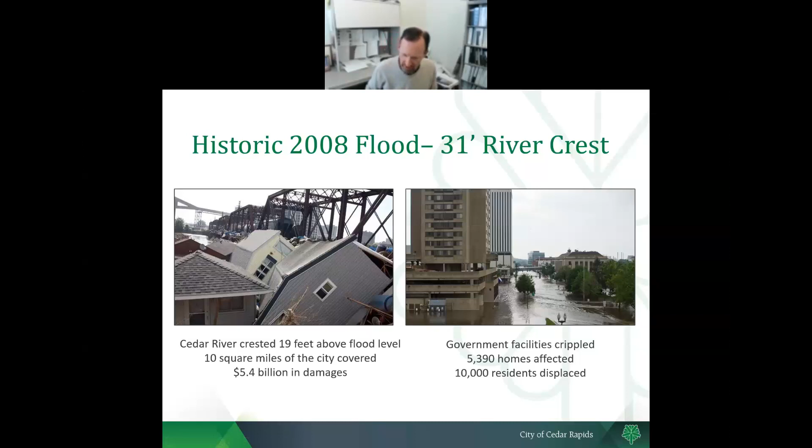First off, I also want to thank you all. It's Engineers Week. It's 4 o'clock on a Friday afternoon. We as engineers don't get a lot of praise. Our public works director likes to say ours is a noble profession, and I agree. And I just wanted to thank each and every one of you for all the things that you do, because at times it is a thankless profession. I know a lot of you work on the City of Cedar Rapids project. So again, thank you. Happy Engineers Week to all of you. And I've already got my Friday afternoon present. About 3 o'clock this afternoon, the City of Cedar Rapids lifted its mask mandate, which has been in place ever since we came back in the office last year. So things are looking up in lots of ways.

Maybe not this picture on your screen. These are some photos we wanted just to give you the sense of 2008. Many of you have probably seen these before, but this is a 31-foot river crest on the Cedar River, 143,300 cubic feet per second. We're probably well below 10,000 cubic feet per second today. This disaster cost $5.4 billion in damages. At the time, it was FEMA's 5th largest public disaster project.

Unfortunately, it has been surpassed numerous times since then, but 10,000 residents were displaced, 5,390 homes were affected, 10 square miles of the city. All in all, about 13% of the city was underwater. And looking at the numbers, the minor flood stage on the river gauge is 12, moderate 14, major 16, and 20 was our record in about 100 years of records. And then comes along a flood that's 11.12 feet above that.

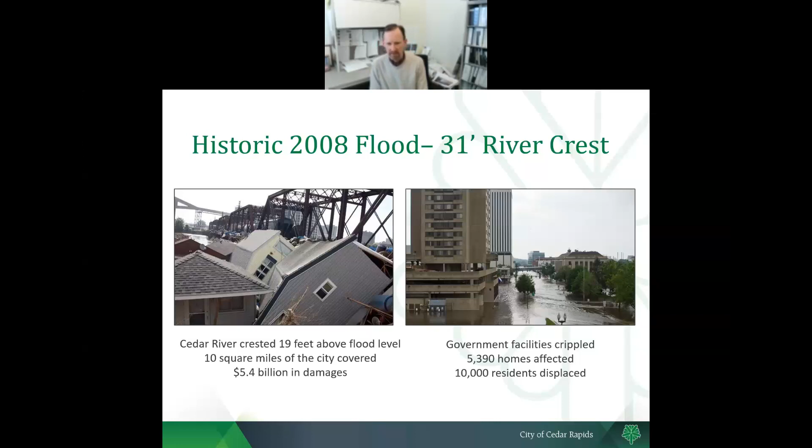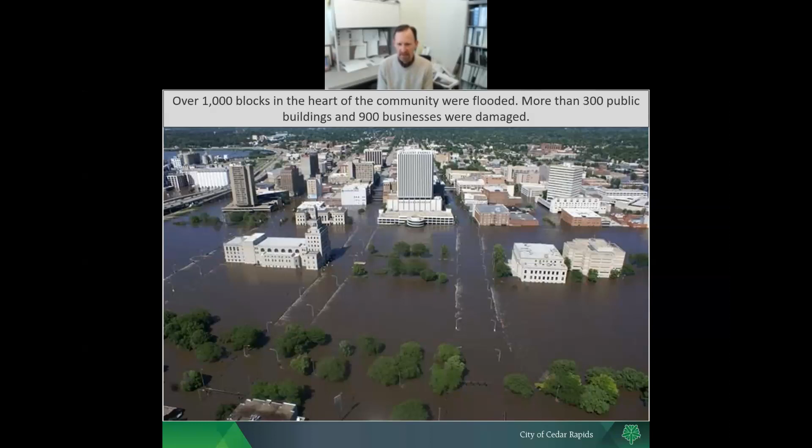If you want to go to the next slide, Mike. Just some other photos here. I think I mentioned in that update there, 1,000 blocks of the city, 300 public buildings, 900 businesses. The kind of ripples in the river there, that's the railings on the First, Second, and Third Avenue bridges. That was our city hall right in the middle of the island there, or in the middle of the river. And then there's also the county courthouse and the county jail on the right side of the screen in the middle of the river. So, just still hard to look at these photos and just imagine how much water there was. Next slide, please.

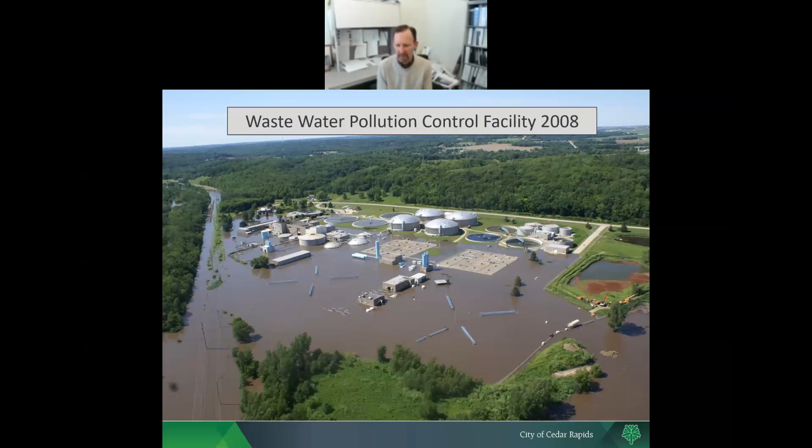Next slide, Mike. So I want to talk just kind of the resiliency here. The picture on the left is June 2008. So we're going to kind of walk you through those. September 2016, we had our second highest flood of record. That was 21.97 feet. So it eclipsed our previous record before 2008 by almost 2 feet, but it was still 9 foot below the record flood. And what's interesting about that one, this was kind of the opposite. There was 12 inches of rain in the upper Cedar River watershed, and then that was it. And then the water came down, but there was no rain on top of that. It was a much drier year.

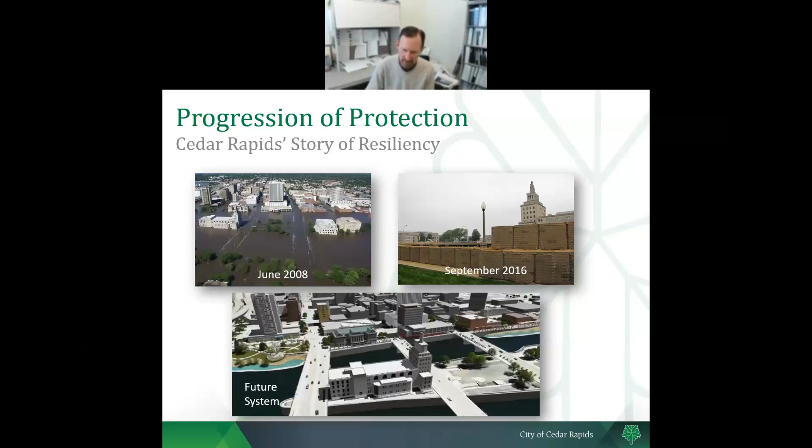So the forecasts of river stage were around 25, but it actually was several feet less, which was fortunate for us because we don't have a flood system in place like is planned for the bottom section there, which is what we're working on with the Army Corps of Engineers. That's the $750 million project. You can go to the next slide, Mike.

This is the flood control system. We'll be talking mostly about the area in the red box there, the Cedar Lake area, the north tie off on the east side of the river. But I'll just walk you through this. The Army Corps project, which we work on with them, is that whole east side. It starts at where that red box is at Interstate 380, and then it runs down the Cedar River by the Cargill plant or by the Quaker Oats plant where the cursor is, Interstate 380, through the core of downtown Cedar Rapids, and then it kind of winds its way downstream past all the bridges, and then there's a Cargill corn facility at the south end there, and it ties into high ground.

The legend is blue is a permanent flood wall where the real estate is restricted. The magenta or purple color is the levees. So I think our widest levee footprint is about 130 foot base and it's about 23 foot high. That's in the Sinclair area. In the downtown section where we have limited real estate, we wanted to be careful not to wall off the river where there's a lot of activity on the river. I mean, it's one thing to have a permanent wall around Quaker and Cargill, but downtown area, we will be going with a knee wall and then removables above that.

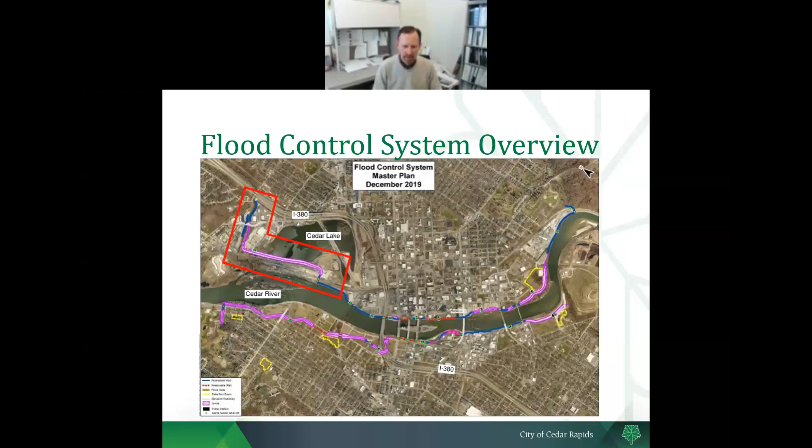But let's start talking a little bit about that area by the Cedar Lake. I want to give you kind of an impression of what we're dealing with here. The original alignment that the Army Corps of Engineers had back in their 2011 report came around the Quaker plant and then tied into Interstate 380 just over by St. Luke's Hospital, where that purple line is. The city had a locally preferred plan that we pitched the Army Corps. It was one of their concepts, but from a benefit cost ratio, this was what was approved in the 2014 WRDA bill.

However, I mentioned that there's a West Side system. At the time that the chief's report was signed in 2011, the West Side system wasn't there, so the river rise to the west side with the East Side system was about 3/10 of a foot. However, when you put in the West Side system, now the river rise goes from 3/10 of a foot to 3.5 feet in that 2008 flood volume, which is the design storm.

Well, because of that, that whole area, Cedar Lake and the properties that surround it, 86 properties would have taken more water than they took in 2008 because of the existence of the system downstream. So that's a problem. Additionally, the Cedar Lake is a very important asset to the City of Cedar Rapids community that desires to turn that into something similar to, I'll say, Grays Lake in Des Moines, if you're familiar with that.

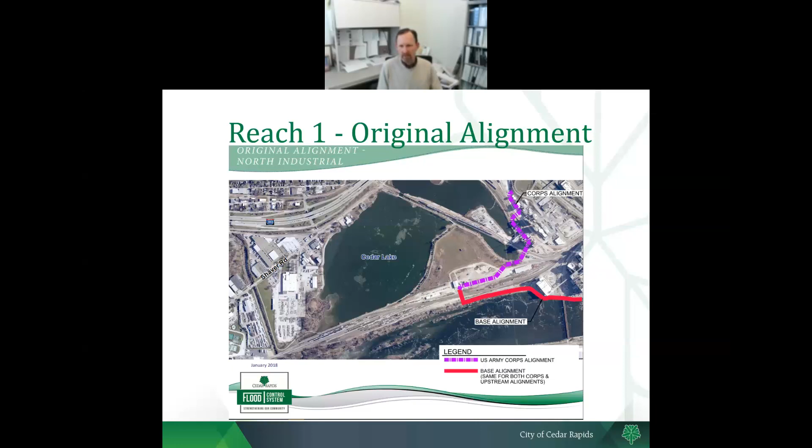So this is kind of what we're doing. I just wanted to show you this area. When we look at developing a flood control project, I think I said to you before, I really appreciate everything all the engineers do, and we are taken for granted. The City of Cedar Rapids doesn't really think about much of what the city's flood control division does. They just expect it to work.

What they're really interested in is how is Cedar Lake going to operate? What new amenities are down there? What's the boardwalk going to look like? How can we redevelop this area? How can the bikes be better? How can we fish? Things like that. So the expectations are pretty high on us. We're just expecting, like when you turn the water faucet on, water comes out, right?

This is not looking like an amenity with a huge Union Pacific rail yard there, an industry in the foreground, and you can see there's also some industry. There's a Cargill bean plant, and you can see some of the steam coming up from there. So, not a very attractive area to turn into an amenity with a flood control project. Next slide. It only gets better, right, Mike?

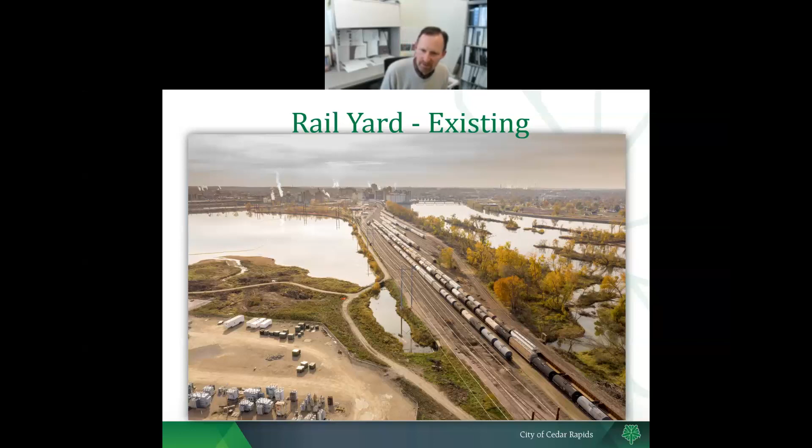Here again, you can actually see the transformers at the Alliant yard sitting there. But there's the Cedar River to the right and the Cedar Lake to the left, and the railroad yard right down the middle. Next slide.

We've had some challenges with bicycles. We've seen some of the other ones. If you were on the Minot presentation, they showed the bike trail there. Well, we try to add those things, and then you're trying to retrofit them in, there's actually more than a 90-degree bend on the existing trail here in that red line, and try to get the bikes on a 3.5 to 4 foot wide sidewalk.

That really doesn't work very well. Plus, I don't know of any bicyclists who can turn a 90-degree bend like that. So that's not good. And that bike trail has about 2,500 users we counted on a nice weekend day. So it's a pretty busy trail. Next slide.

This one, I laugh at this. The Los Angeles River is what I call this. It's just a paved concrete channel for McLoud Run. Could we have made this any more utilitarian? And you can see it just fills up with gravel. Upstream of this on McLoud Run, it's an impaired stream, but it is stocked with trout, and it's a trout fishing stream. So it's the state's only urban trout stream, and then it just kind of morphs into a concrete channel. So people want that activity of fishing, but this is what we gave them.

Next slide. This is Shaver Road. This is that International Paper. When they're at their loading dock, their vehicles, the cabs actually sit out in the road. These are the things that, again, the public will notice, not the flood control system, but here's another opportunity for something we can improve. Want to go to the next slide, Mike?

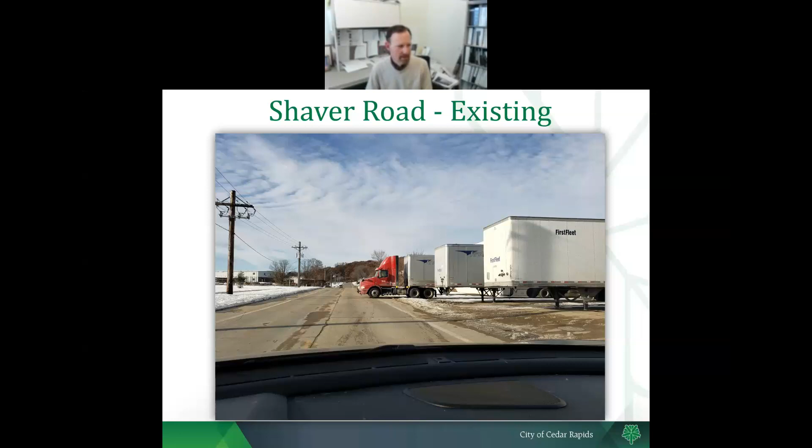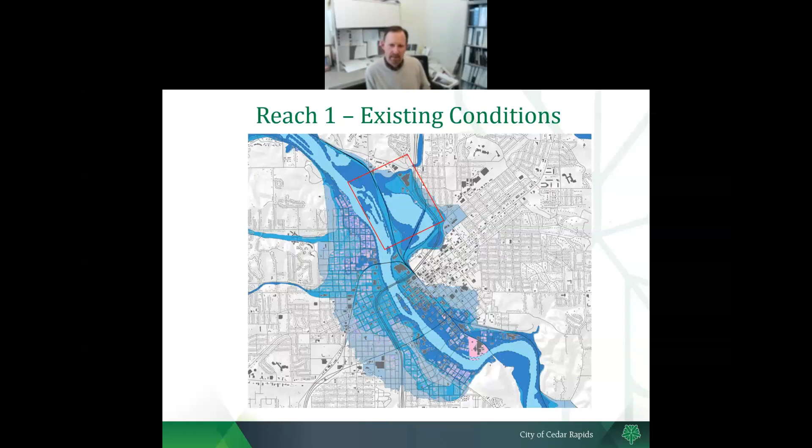This one here is up along McLoud Run. The different colors just show the area inundation. We are going to the 2008 flood, which is above the 500-year storm. Even with the revised FEMA maps, we would see that to be maybe about a 750-year flood. It's between the 500 and 1,000.

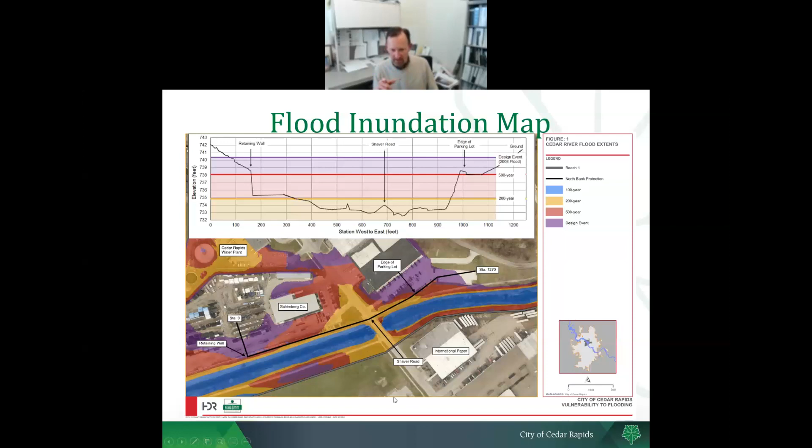And it's important. Shaver Road is clearly inundated at the design event, but it's a truck route and it's only one way in, one way out. So it's important to raise that. And you can see the water plant is underwater. The only area that would actually be dry would be just a small part of the yard of that Schimberg company. And that whole south area on the bottom of the screen is also underwater. It was just drawn to the point where the flood wall will go. If you want to go to the next slide there, Mike.

We're going to talk about the importance of the goals of the project. Safety, obviously, the flood control system has to work. We were looking at a presentation earlier today in Kansas City. We're trying to go right for the gold standard and go to the 2008 flood, which, like I said, was 11.12 feet over our previous flood record. It was also in a previous study of the probable maximum flood. So it's safety.

The next one is economic development. Like I mentioned, truck routes. We've got to be able to keep our economy moving. Even in 2016, when we sustained very little damage with the second highest flood and the HESCO barriers, there were businesses that were teetering on bankruptcy just for being evacuated for 2 weeks. So the idea of having permanent flood control that businesses can be behind is extremely important.

And then, like I mentioned, the community amenities. The idea behind this flood control system is to hide it in plain sight. We've been referred to as Disney Imagineers. We want the public to see the other components of the flood control system, which are the skate parks, the kayak launches. We're actually looking at a whitewater course through the dam, the improvements to Cedar Lake, the fishing streams, things like that.

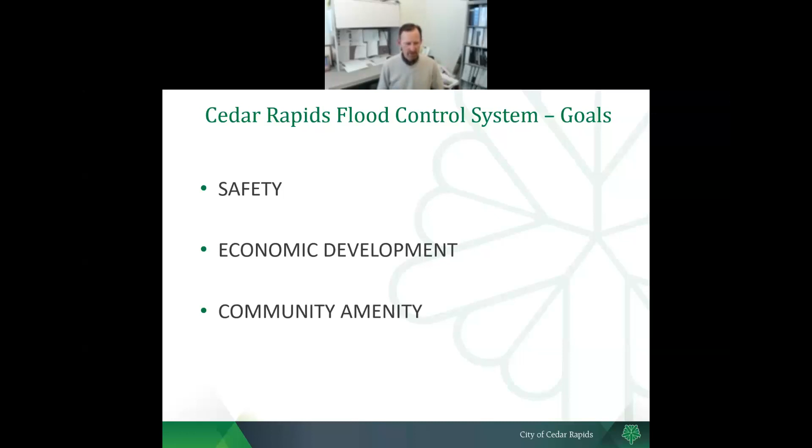And oh, by the way, it happens to protect the City of Cedar Rapids water treatment plant and the wastewater plant. The public doesn't have to know that, but that's the things that we engineers do every day. I'm going to turn this over to you, Mike, now. You can go through some of the details in this McLoud Run area.

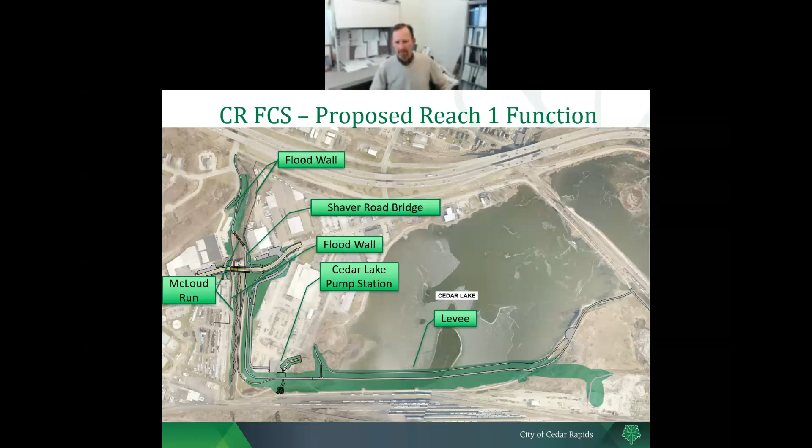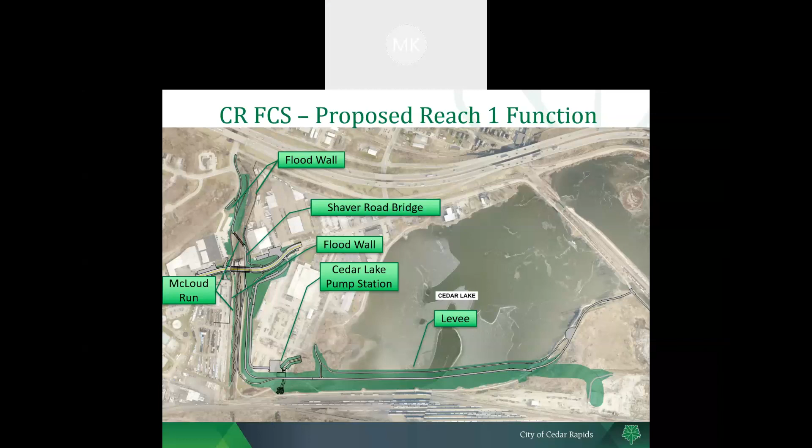Sure. Thanks, Rob. So as Rob mentioned, there's a basic function, right? The flood system has to work. So here's just a rough idea of what we're implementing. We've got flood walls, levees, and a pump station here by Cedar Lake. But what we're really trying to create is those amenities, to create basically a flood system without it looking and feeling like a flood system.

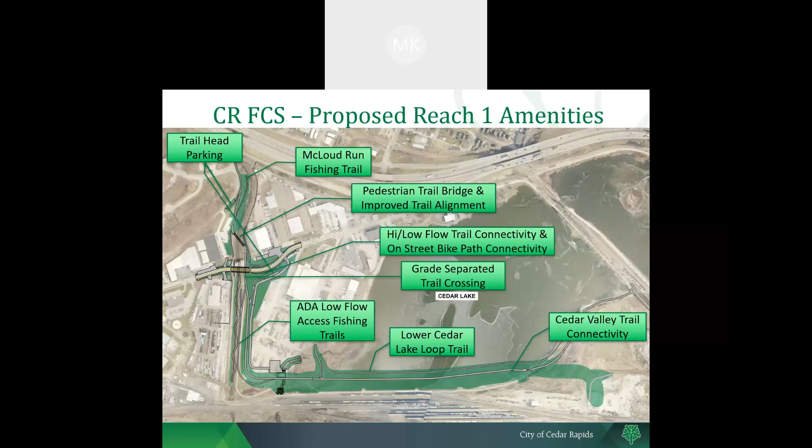So we're implementing ADA compliant fishing trails. We have improved trail connectivity, lots of recreational amenities, actual places to drive and park your car for trailhead parking, bike fixing stations, a lot of different amenities that we're implementing as part of the improvements here that we're trying to basically hide within the flood system.

So there's a lot of improvements around Cedar Lake, partnering with Connect CR. There's a lot of amenities that we're trying to enhance Cedar Lake with, make it a place that people want to come visit and promote recreation in the area. There's a lot of existing businesses there. So that plan takes everything into account and makes this area thrive.

So how do we do that? We do that using those city goals. So safety at the core: it has to work, it has to function, it has to reduce the risk of damage and loss from flooding. And reach one specifically here at Shaver Road, reducing the flood response time. So building a roadway and bridge that goes up and over the flood system removes actually 2 gate closures, to increase that flood response time

and improve trail safety. So creating a grade separated trail crossing, pulling that bicycle user off the roadway at this type of interaction.

So we do that also with economic development, not only keeping access to businesses open during times of high water, but also minimizing impacts to businesses during and after construction. And I think we focus a lot on after construction, the levee that goes in here, the flood wall that goes in here. How do we make this a positive and a win-win scenario for all the businesses in the area without imposing any kind of negative impact long term?

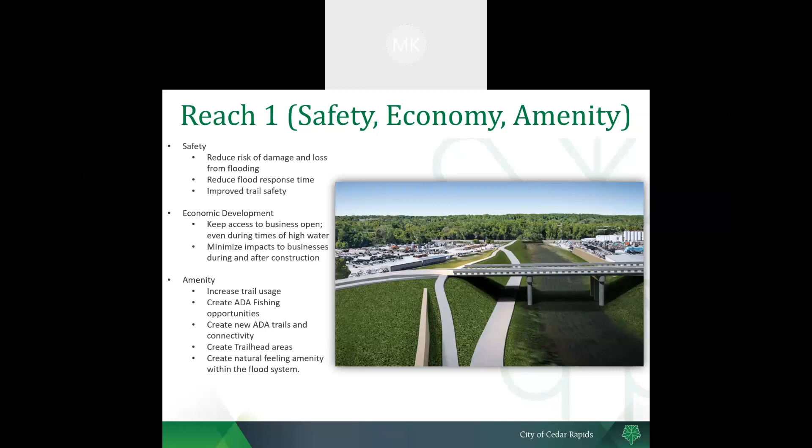So how do we do this? How do we make all this happen? Well, we work through a handful of challenges, and the next handful of slides will dive into some of the larger ones and how we accomplish all of those goals that we just talked about. So property owner impacts, the flood systems that come in here. I think Rob mentioned earlier, some of the bases of the levees are pretty wide, over 100 feet, and flood walls are pretty vertical, but still impose kind of a larger footprint.

So we really focus on keeping businesses open through construction, hitting on that economic development portion, minimizing impacts during and after construction, and then involving property owners through the design. Property owner involvement has been one of the keys to success. And Rob could tell you, I think he's had weekly standing meetings with Quaker for 8 years. So that just goes to show the level of feedback and commitment that the city's made to involve all the property owners through the whole design process.

And each property owner has a different priority item, but these were the 3, at least for this area, that seem to float to the top for everybody here. So how do we accomplish that? Well, we take tours of the businesses, learn the business inside and out, find their access points, get to understand their shift schedules, their peak times, their delivery routes, everything like that, and develop a plan. So we actually have phase by phase truck turning templates to make sure they can still have access to the primary functions of their business. We create alternate access points from other roadways or back entrances into the business, just to provide that extra amenity to remove some of those impacts that they might see.

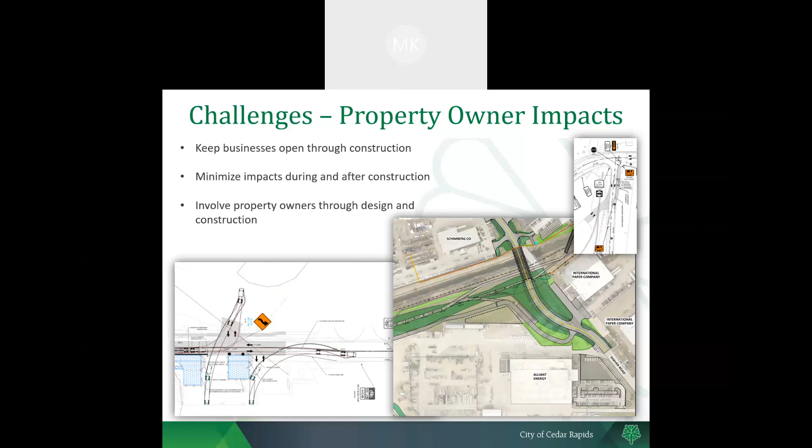You'll see here in the image down below, we built the roadway, as we mentioned earlier. This roadway specifically is being raised about 12 feet or so. So we're building the majority off alignment so that the existing roadway can stay open. We created through iteration two-way traffic flow throughout construction. So you see an extension to the existing culvert here to maintain two-way traffic flow on this roadway.

Maintaining secured perimeters. It's a little hard to see in this image here, but establishing that secured perimeter so that businesses can operate without that crossover between construction work, and even after hours, somebody potentially getting into their property. Just having that secured perimeter delineate our work. You'll see in the upper right photo here, we're taking over an existing parking lot. So we provide equal and offset parking so that businesses can still operate and function even with some of these proposed improvements.

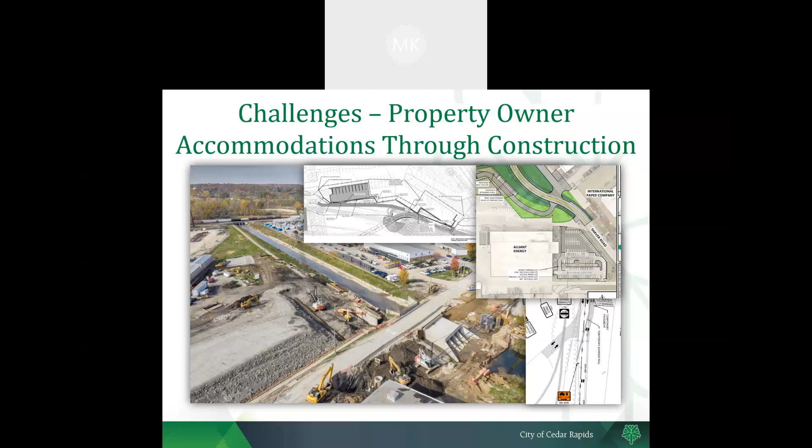So we've accomplished that through looking at that economic development portion and then still creating that basic function: the flood system has to work. So all of that's accomplished through some of this phasing. So taking a look at parking lot impacts and creating that equal offset parking prior to actually removing that parking lot so that everything can function.

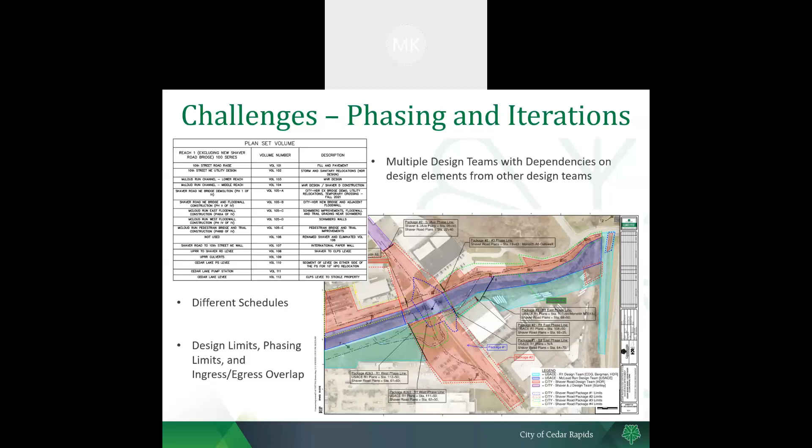So design limits crossover, phasing limits crossover, your contractor ingress and egress overlap. So trying to build that puzzle while taking all these things into consideration.

Utility challenges throughout the construction. We are kind of in a tight area here with existing right-of-way. There's right-of-way constraints through that construction process. The city can't acquire temporary easements for private utilities. And all of that utility agreement is tied to the existing roadway right-of-way. So making all of these relocations happen within the existing roadway right-of-way and not having to acquire all these separate private easements helped accelerate construction through all of this.

You'll see on the right-hand side, talking about building that puzzle, where we are actually driving sheet piling and putting in these underground utilities, and then we put a temporary roadway over it for a later phase. So really complex staging and sequencing that we had to methodically piece together with all of these phases and sub-phases. So you have constructability constraints, phasing constraints, time and space requirements with utilities, getting all the utility companies to agree on timelines and when to relocate.

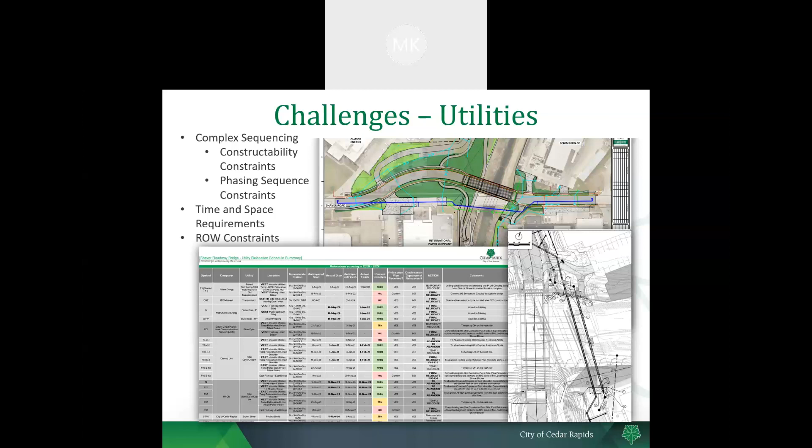So back to some of the phasing, through all of the different packages and lettings and different design teams and different contractors, there's a lot of things that overlap through every phase. So work in right-of-way, acquiring those permits from the Iowa DOT. They've been a great partner as well, allowing these phases and different contractors to phase in and phase out as work starts and is completed, and keeping that permit going through the entire process and not having to issue separate permitting has been a big help.

The Army Corps has been leading some of the 404 permitting efforts, working with the DNR, working through some of the phases. I think we've had a handful of construction and floodplain permits that had to be sequenced based on how the construction started, where we are and how it will end up. So building that entire flood system piece by piece required a lot of coordination, both with the Army Corps and DNR. Then right-of-way acquisition, there's a lot of timing constraints, lots of legal constraints that we have to meet before we can actually proceed with the next phase.

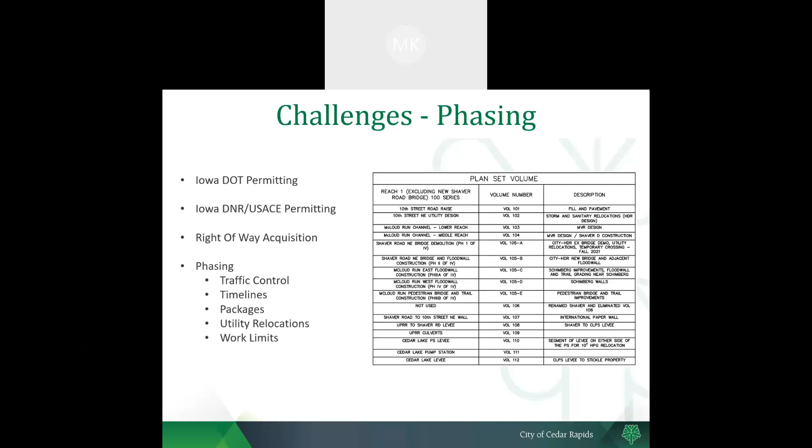So then we talk about these design refinements. So going back into the amenities portion, we created the fundamental aspect of the flood system that works great. Now, to make it not feel like these amenities were just pushed into the design, through refinements we're able to create betterments, not only fixing those existing problems, but creating this environment that promotes recreation and gets people excited about this area.

So we start with a flood wall and a trail on the south side, and it progresses. We start looking at some of the parking lot improvements, some trailhead improvements, and start increasing where that line of protection is on the north side. So it starts to evolve a little bit more. We start looking at impacts to businesses, and we start getting through the iteration process. So we started actually with a complete closure of Shaver Road Bridge, which then evolved into building half the bridge at a time, leaving one lane open, and realized that that just wouldn't meet that economic development checkbox.

So then we created a 2-lane almost all the time throughout construction access for all these businesses, and kind of landed on, okay, now we're building the entire bridge at the same time. So refining even further, looking at the height requirements of the bridge, it had to be high enough so that it wouldn't impact the tailwater, and it had to be low enough so that it didn't impact the driveway elevations.

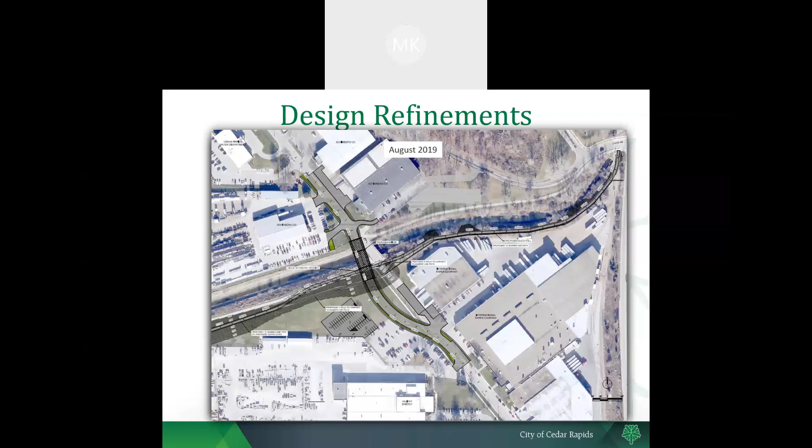end user in mind. So we start to refine a little bit more, start to add this defined trailhead parking, separating all the business parking from the recreational parking. I think that was kind of an important issue to make sure that there wasn't any crossover, that spaces for a business wouldn't be used, and vice versa.

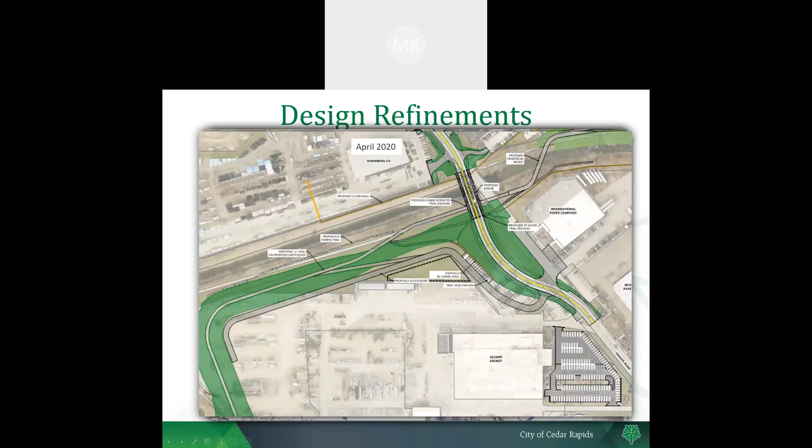So creating a bike fixing station, kind of a designated parking area where people using the trail could connect to, start to refine a little bit more, and looking at the kind of long-term protection on the north side, extending the limits of the flood wall. I think originally we had chosen a HESCO alignment, but then realized that a more permanent protection would be desired. Start to define the trail connections over here. And then even a little bit further.

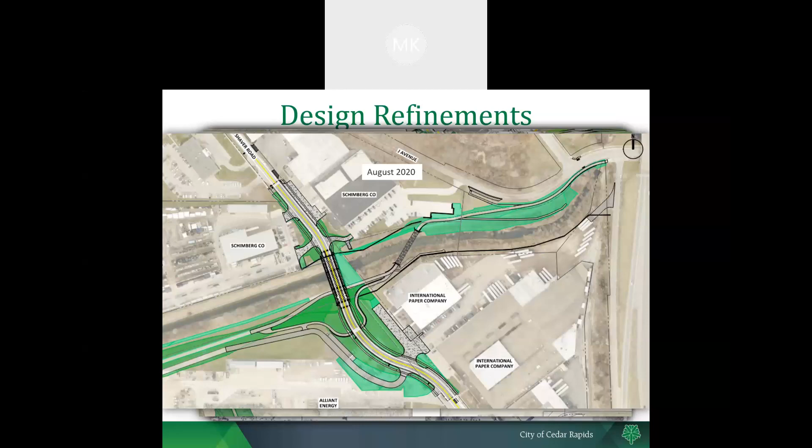So really making sure that this is a usable amenity, taking the trail curves appropriately, creating an opportunity where if there is high water, there's an option to get around that and still use the trail, even if the water is a little bit higher. So we start to see that through these refinements, that amenity portion really starts to shine. Like I said, promote recreation, get people excited, get people down here as part of the project.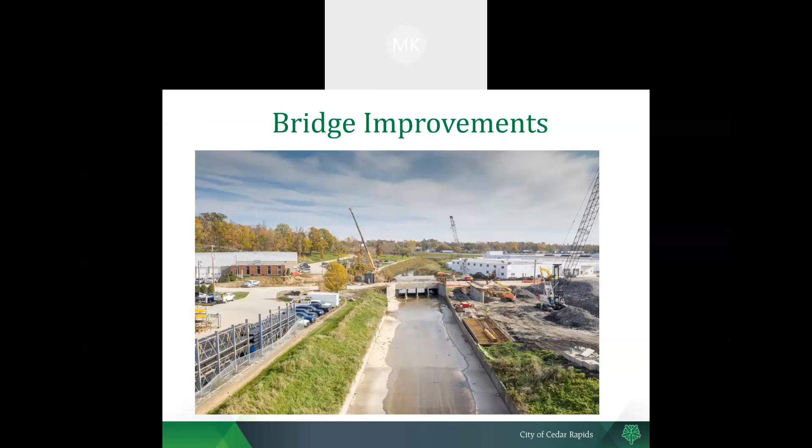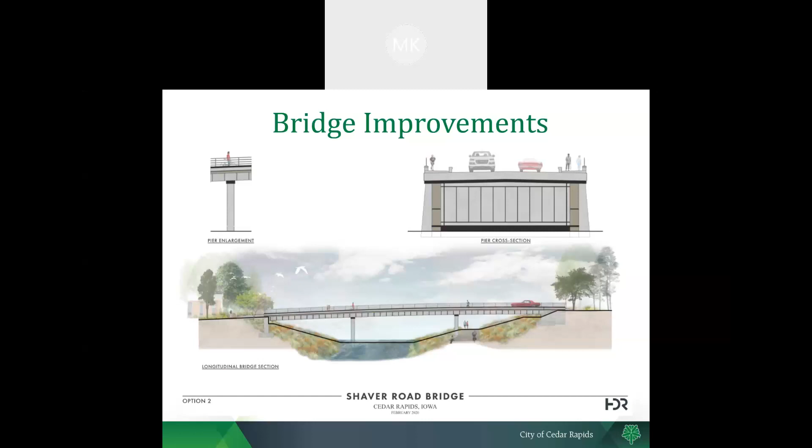So here's the existing culvert, not too exciting, pretty, I would say, industrial area. So we look to improve it and create this more aesthetically appealing, but not overly appealing for the industrial location. We make it true to the area of which it is. So we keep a consistent aesthetic throughout the entire system.

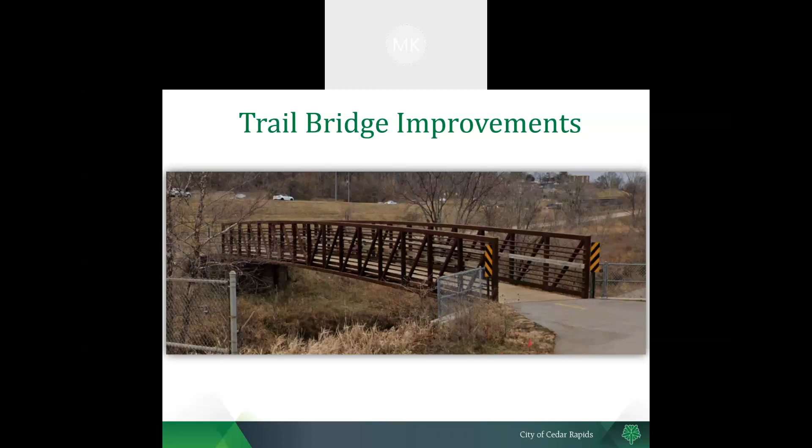So we're looking at trail bridge improvements, very enhanced trail bridge for the users that fit within the context of the area. We talk about improving these 90-degree bends throughout the trail and eliminating all the bends, keeping those design curves such that a type A bicycle rider could have fun on this trail.

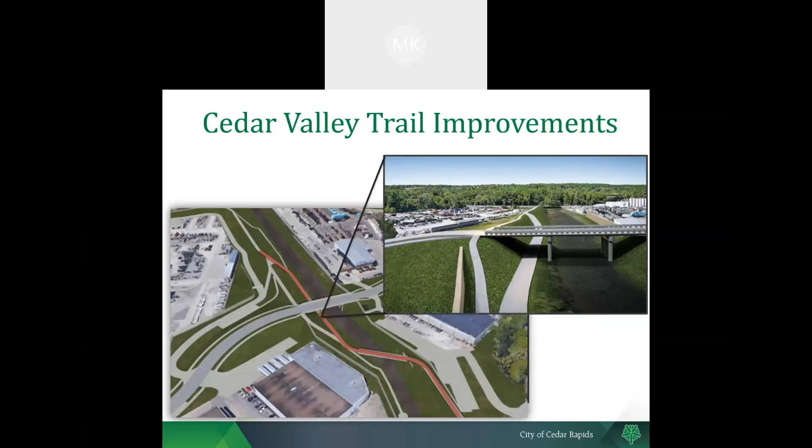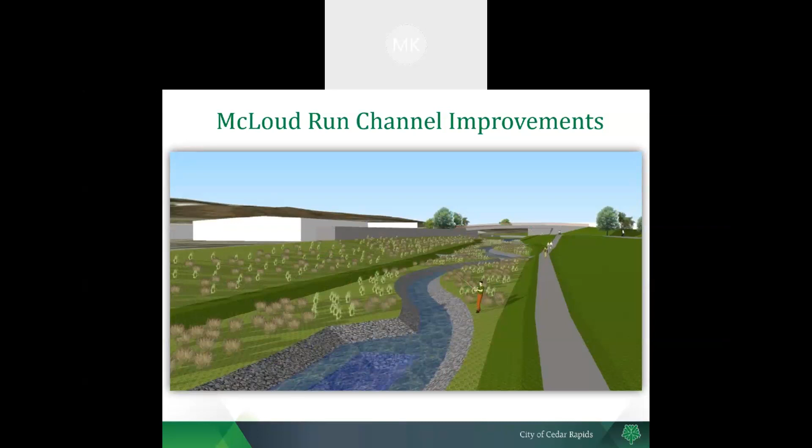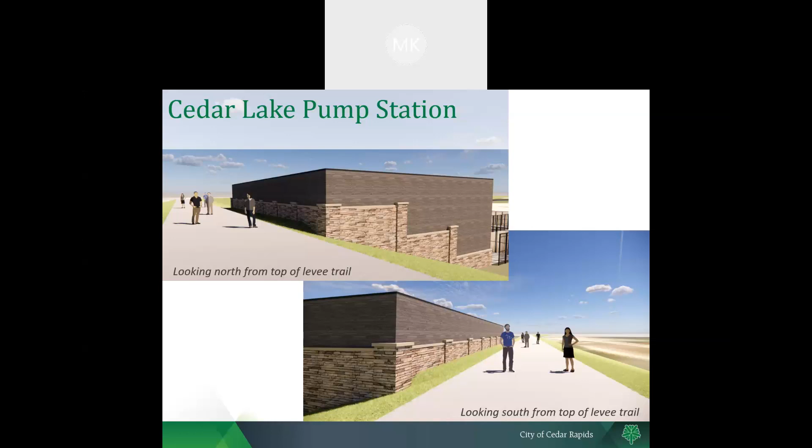Looking at the very rigid engineered concrete channel, improving that with that natural feel that creates that ADA fishing amenity throughout the entire McLoud Run area, creating pump stations that don't look like pump stations, that higher aesthetic through the area, and that kind of blends the function of a flood system within the amenities here. And Rob, if you want to talk about some of the success measures here.

Well, sure. I thought about, I could go back through the safety and the economic development and the amenities. I think Mike hit it pretty well. The story I think I would tell on this to really emphasize the point, and it might differ a little bit for those of you who watched the Bison Bridge presentation this morning. The comment was we wanted to make sure there were no taxpayer dollars in that because nobody likes to have their taxes raised.

I would say if you do this right... The city of Cedar Rapids is in the middle of a 5-year tax increase to pay for its share of the flood control system. We have raised our tax levy rate 3 times, 15 cents per $1,000 of valuation. And the first 3 years, not one person complained at the city council public hearing for raising taxes, not one.

If you do this right, people get excited about it and realize that they would rather pay that extra in their taxes than just be walled off and not have any amenities. I mean, to me, that's the conclusion right there, that we're doing this right.

People getting excited what they're seeing, and I can tell you, Mike is a good engineer. He's working on the Interstate 80 and 380 interchange, the utility coordination there. But I probably frustrated the heck out of him with this project because we tried to design the flood wall and the bridge. It first started out with gates, like he said. But what maybe he didn't really enunciate very well is we said, scrap the design, you got to start over. We want you to lay out every one of the amenities first without regard to what the flood control component is. That's the only way it's going to look natural.

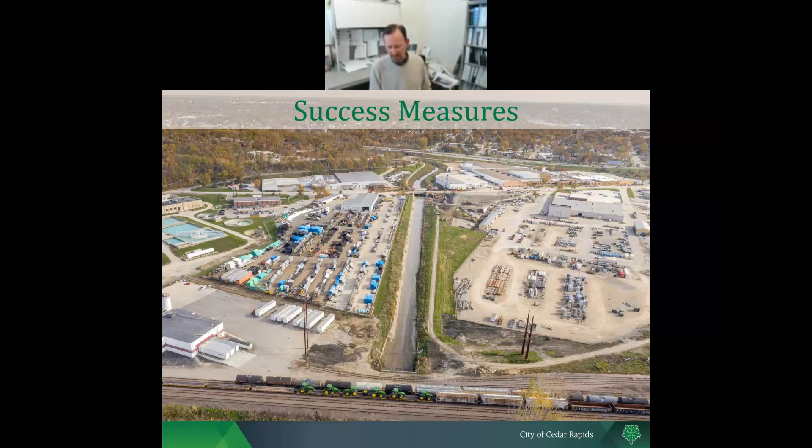We at the city subscribe to the 5. We've all had to read The Five Dysfunctions of a Team, and you're probably not successful if everyone's all just getting along. There needs to be a certain amount of conflict, not too much where people start hating each other or fighting, but that's where the good ideas come from, is from conflict and some of the frustrations. And so don't be afraid to let that conflict come in and really chew on this some.

I know there's some people on this presentation today said, I can't believe we're looking at the trails another time on this. But I think the reward is, and again, this is where you drop the mic and say we're done. We're raising taxes and nobody's complaining. What can you say to that?

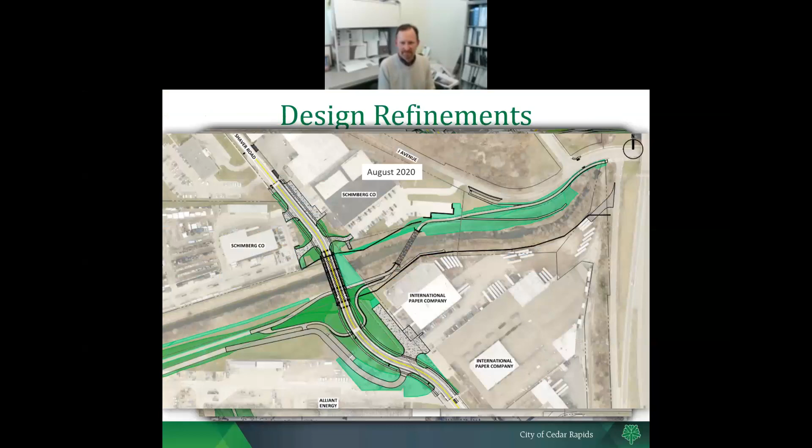Tom did put one question in there about finding the best watering hole in Cedar Rapids on a Friday afternoon, if anybody's got any thoughts on that. Well, if you're around Cedar Lake, a lot of people like to go to the Sag Wagon, which if you see all those amenities on Cedar Lake, we're planning on doing with a separate funding source. That would be a good one. See if I can grab a location here. Oh gosh, it's even in the presentation. Right there. I love it. Special call out. Well, this was a perfect Friday afternoon presentation then. There you go.